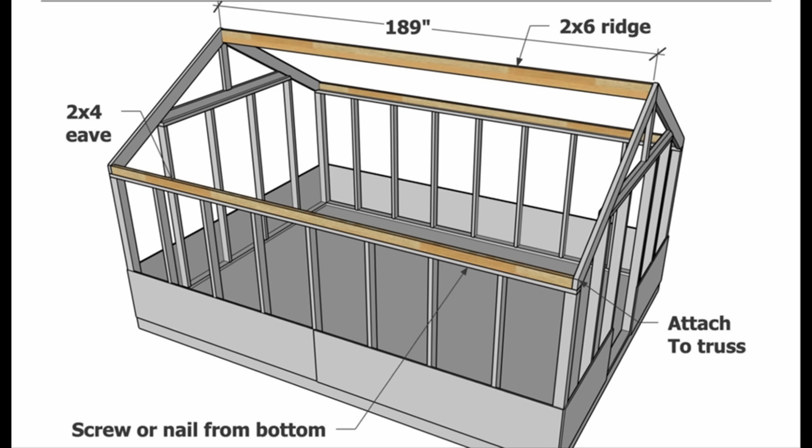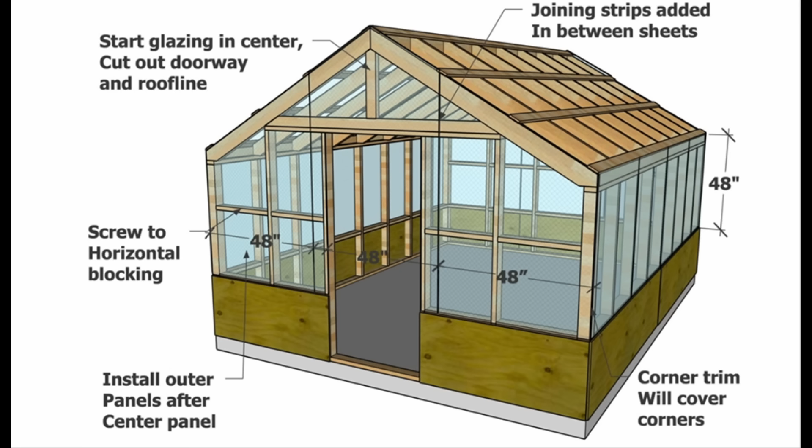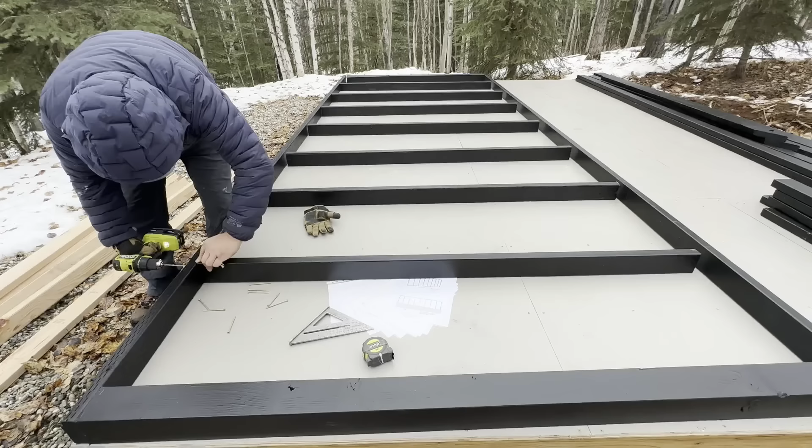Last fall, we had an opportunity to work on a greenhouse project with some friends. They had already built a deck and prepared a base for the greenhouse. So I came up with a plan and they pre-cut and pre-finished the pieces, and we worked together to assemble it over the winter.

We decided to add plywood to the bottom of the walls to help square up the walls and give it some lateral structure.

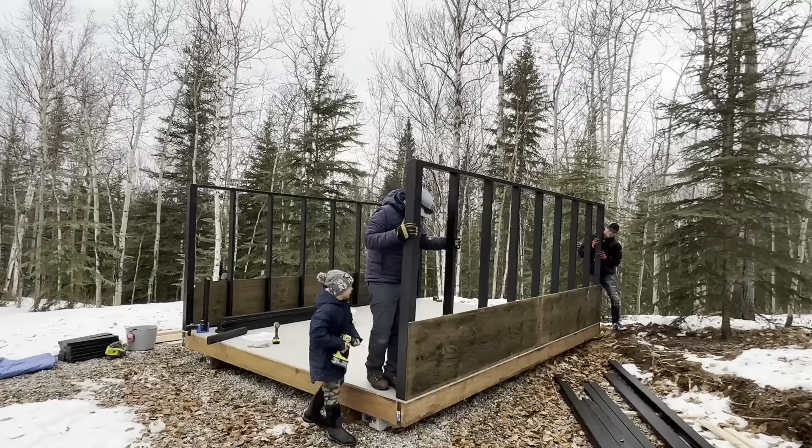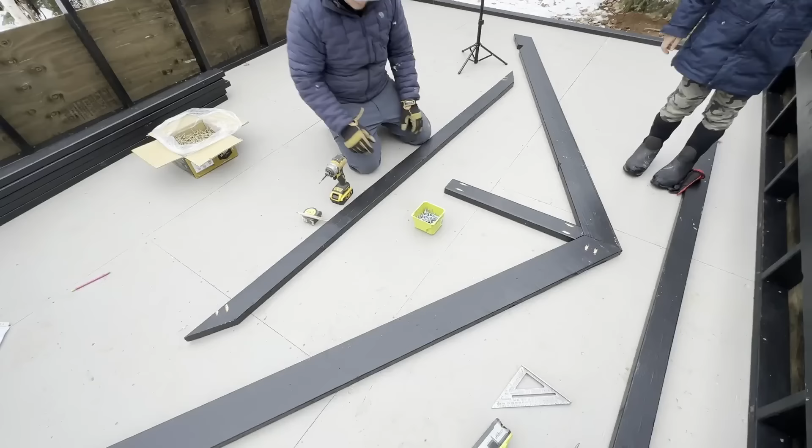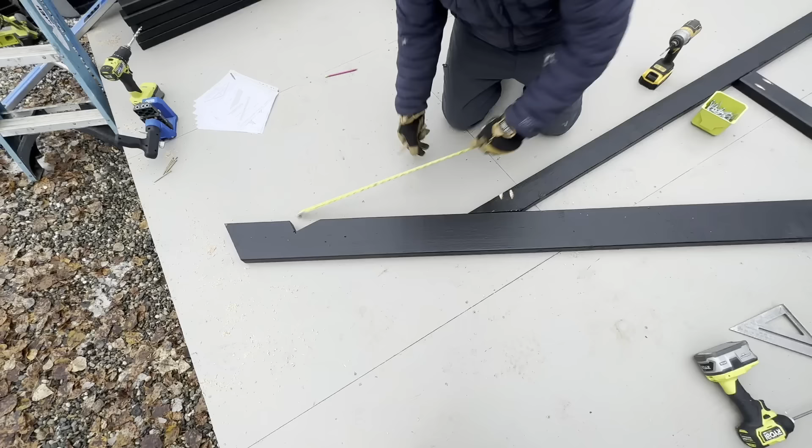The way we're going to build this roof is build 2 trusses for the ends using pocket holes, and then we'll put the trusses up, the ridge pole in between, and then run the rafters off of this. Our friends have already pre-cut and pre-finished all of the pieces, so this was just a matter of assembly.

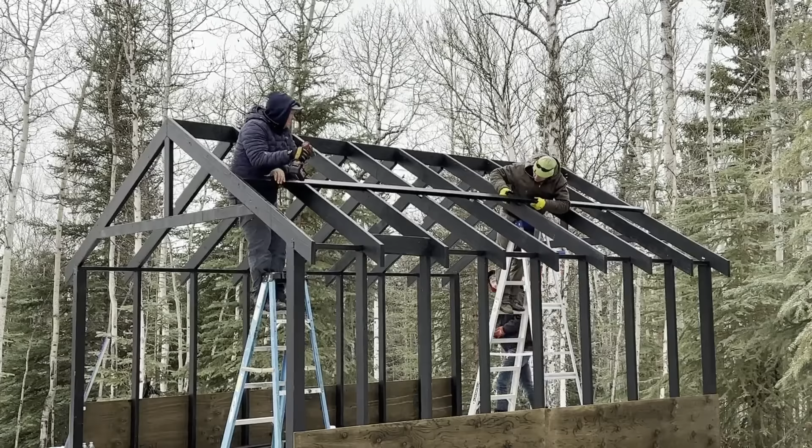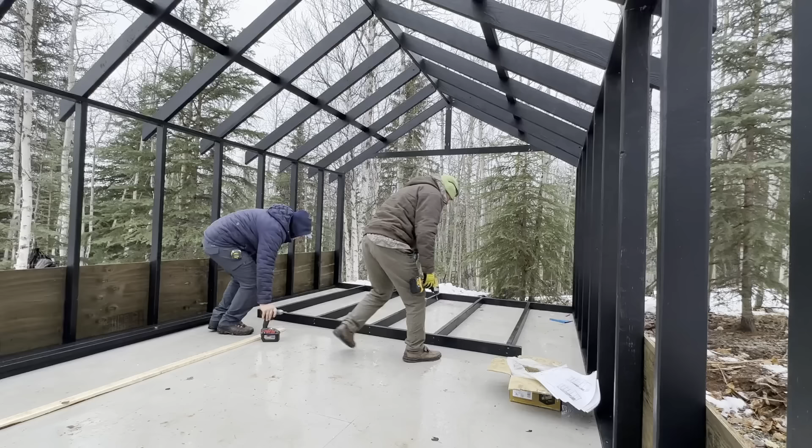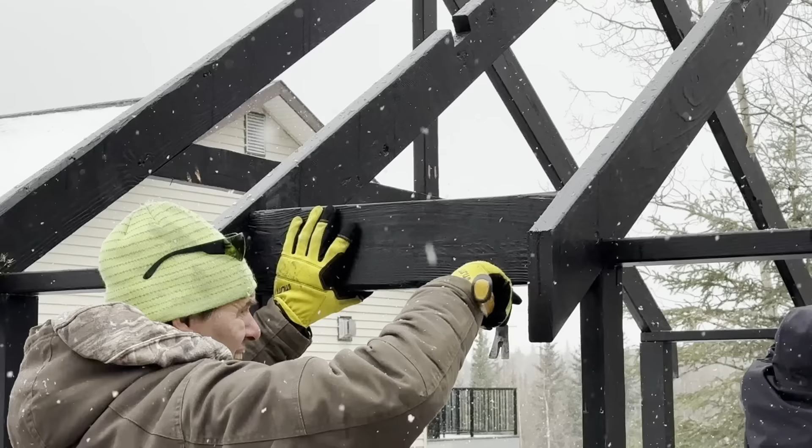After we got the roof on, we framed up walls for the front and the back. In the plans, I end up doing away with the overhangs on the greenhouse because they were quite a bit of extra work and extra finishing detail, and I just went flush with it so it's easier to install a gutter.

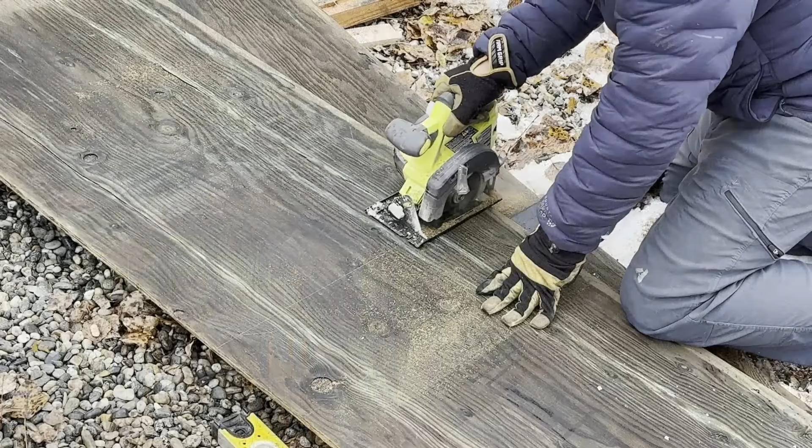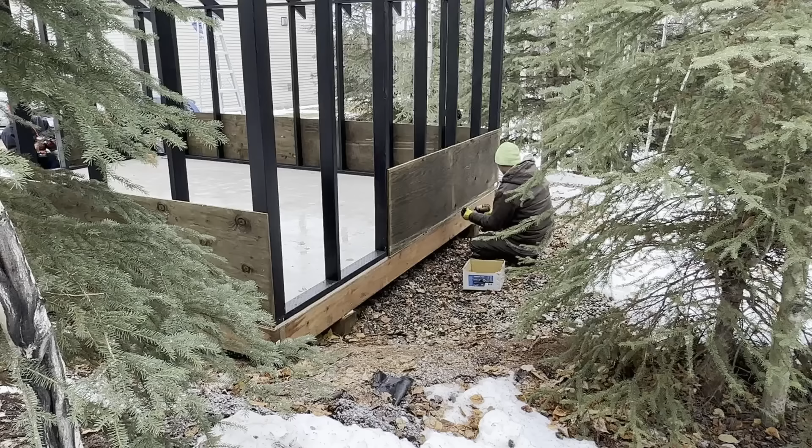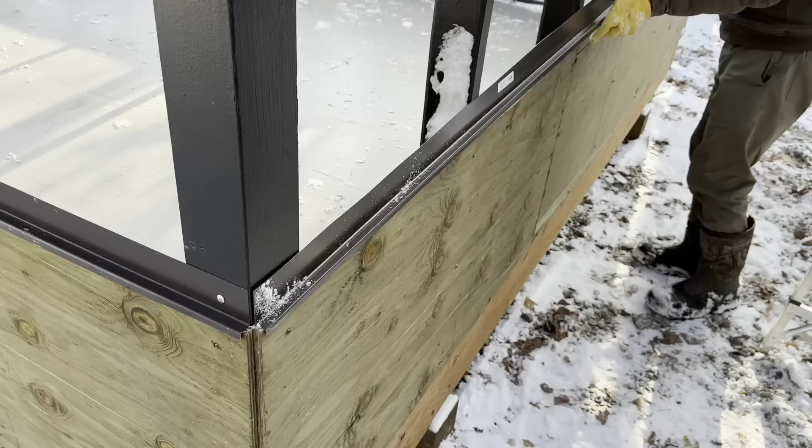Then we went back and added plywood to the front and the back. This is going to give the greenhouse structure at the base. We added metal flashing over the plywood so that the water would drain over the plywood.

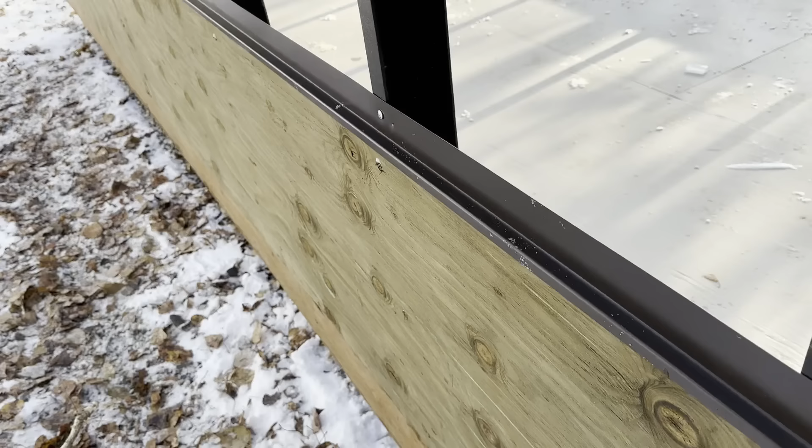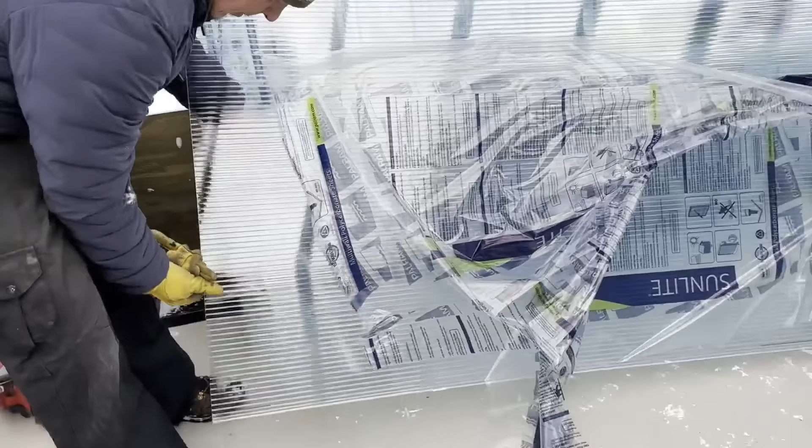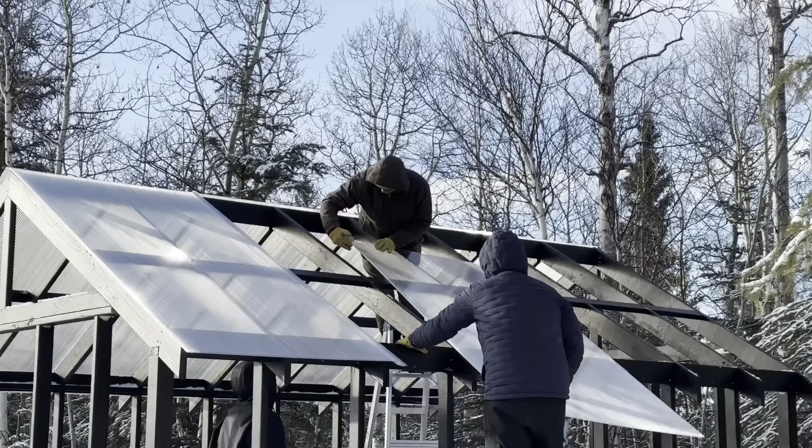For the greenhouse panels, we're using this twin wall polycarbonate, and it's got an insulating factor, and it's also flat on both sides, so it's a little bit easier to install, and I think it looks a little bit better. We battled trying to get the H channel to fit over the greenhouse panels, and it just was such a struggle. So someone had the idea of using some bar soap, and it worked really well.

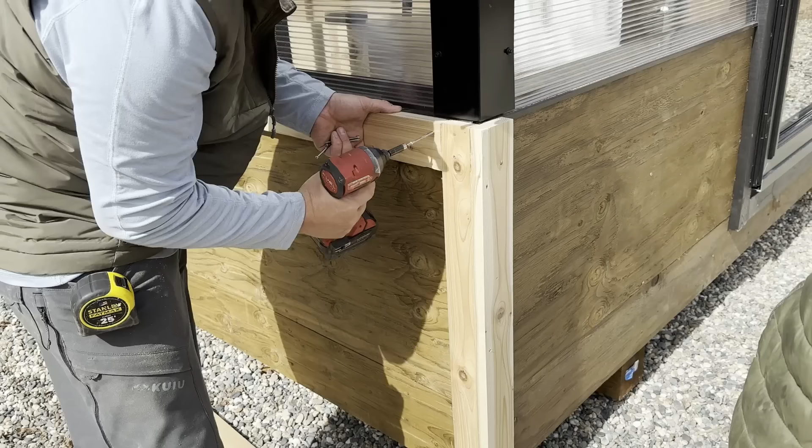To give the corners and the ridge a finished look, we used some wood trim. This plan is optimized for 4x8 sheets of the greenhouse panels. Since they're expensive, we wanted to make sure we were getting the most use out of them. We designed the opening for the door to fit a storm door or a standard screen door.